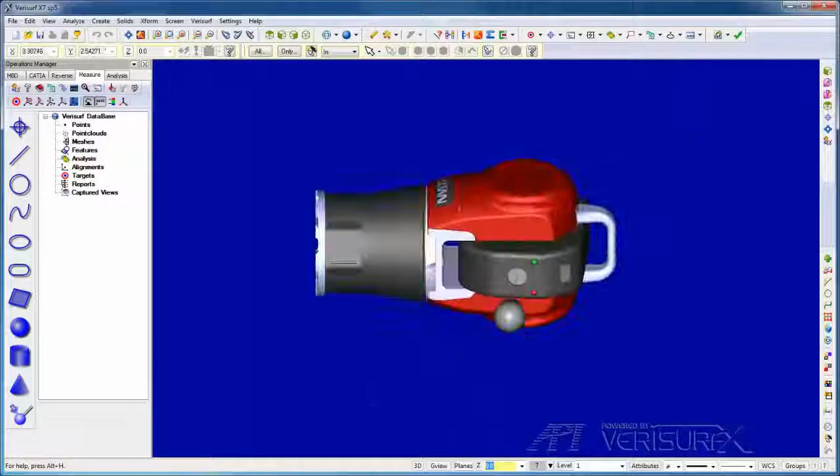The tracker has a measuring range of 160 meters, or 80 meters in any direction. The Radian includes both interferometer and ADM for accuracy as well as ease of use. The tracker mounts vertically, horizontally, or even inverted for measurement in tight quarters.

The iVision system uses an integrated camera for automatic target location and beam capture. Finally, the Radian includes an integrated weather station as well as an internal level. These are just some of the highlights of the Radian hardware. Next, we'll look at the software.

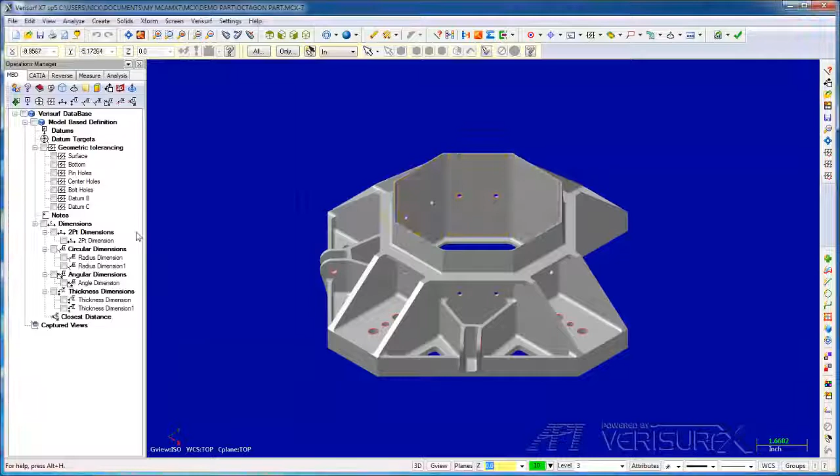Verisurf's metrology software is built on a CAD platform, giving it full CAD design capabilities. CAD is required for reverse engineering, but it's also very helpful when inspecting complex parts. For example, we can analyze the model, we can pull dimensions from the model, we can even manipulate the model.

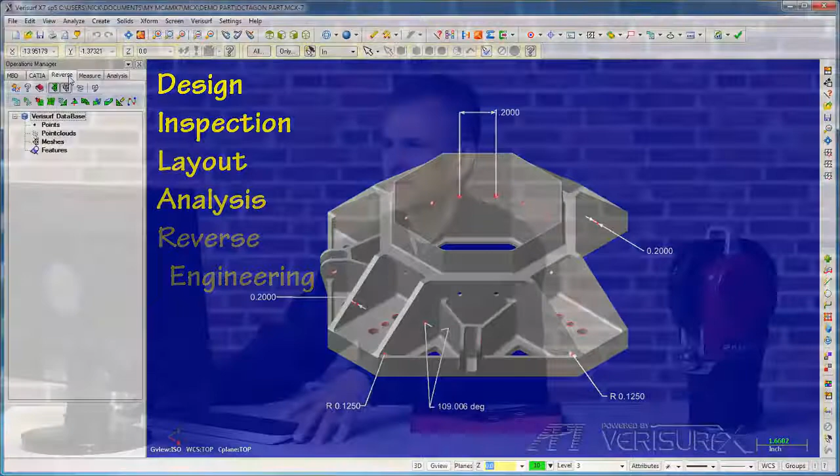In addition, CAD tools such as colors, levels, and attributes allow us to manage large part assemblies. Verisurf integrates design, inspection, layout, analysis, and reverse engineering all into a single application. Finally, Verisurf is designed for both print and model-based workflows. I'll continue by loading a model of our demo part.

Verisurf reads all popular CAD files, CATIA, NX, ProE, SolidWorks, etc. in their native format. This avoids the limitations of neutral formats such as STEP and IGES, which Verisurf also supports. When we open a native file, Verisurf saves it in the MCX format and leaves the original file intact.

All the data, including the model, the measurements, the reports, and the analyses, are stored in a single file to simplify handling and to prevent data loss. I'll select the MCX format and open our demo part file. The part is in place and the model's loaded. In the next step, we'll align the Radian tracker to the part.

After we load a model, we typically align the device to the part so we can get real-time feedback on tolerance condition. We'll use auto-align since it's the easiest way to align to a model. We start by placing alignment targets on the model to control the orientation of the part. Since the Radian is in front of the model, we'll place the alignment targets where they can be seen on a clear line of sight from the tracker.

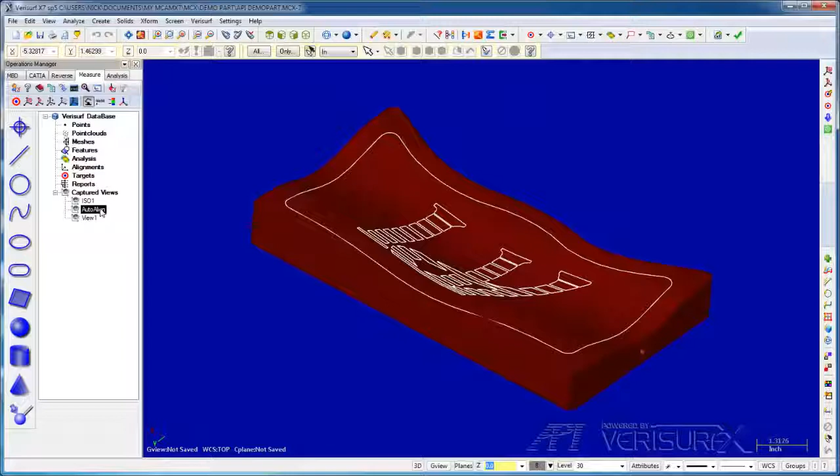I'll start by selecting an appropriate graphics view for the targets. I'll then choose Create Target and place alignment targets on the top, front, and side of the model. Since I want the graphics view to match the camera view, I'll restore the original view.

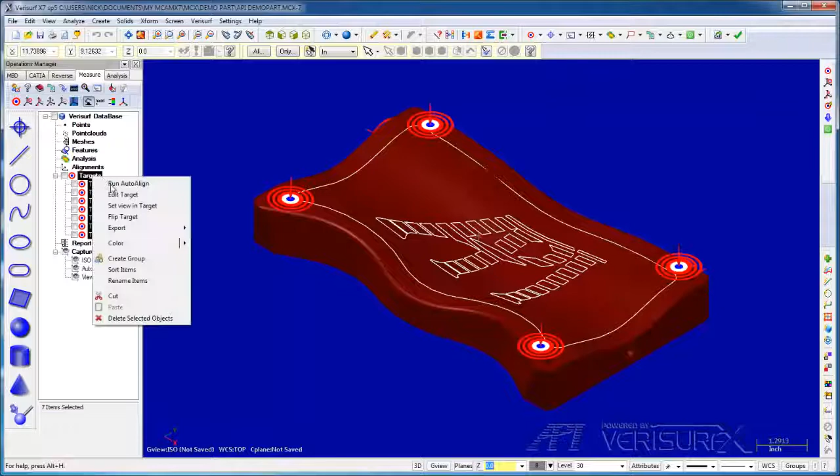Before I run the alignment, I'll edit the targets and enable Use Smart Point. When we use the Smart Point measuring method, Verisurf records the target when I hold the SMR stable on the part. I'll run Auto Align and measure the targets as they're highlighted.

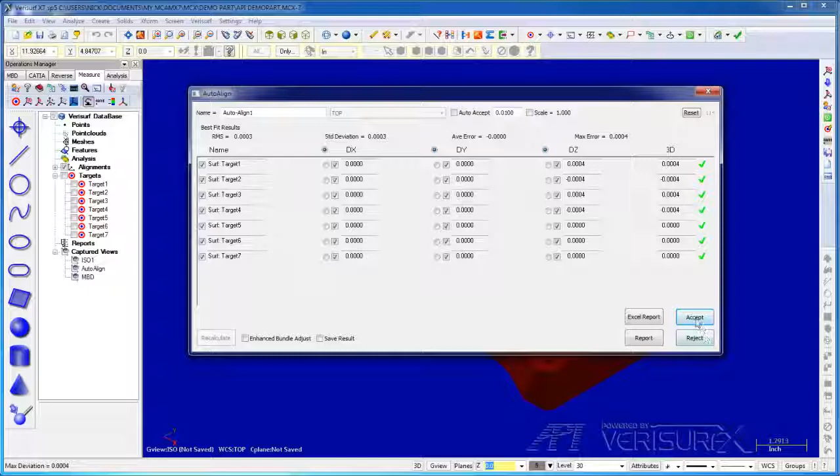When the final target is measured, Verisurf aligns the device using a best fit and shows the results dialog. We can review the results and modify the fit if necessary, but since the results look good, we'll choose to accept the alignment. When we do, Verisurf runs Inspect Build mode so we can verify the device alignment.

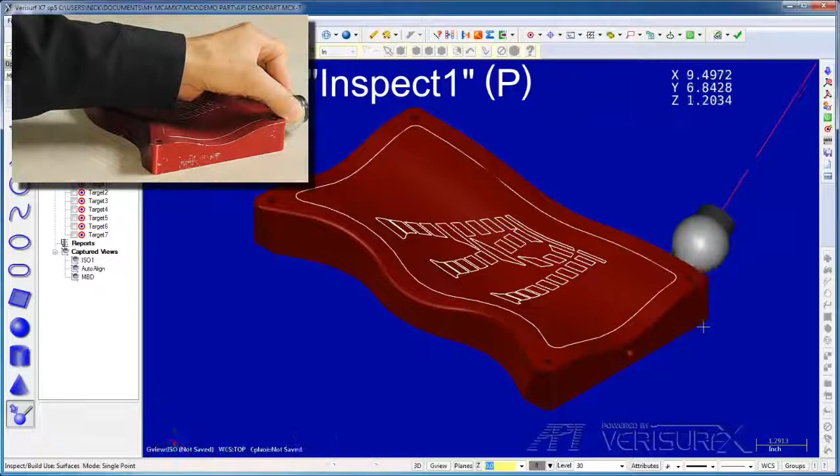The small deviations we see as I move the SMR around the part indicate a good alignment between the part and the model, which shows that our alignment is correct. This final check validates the whole auto-align workflow because it shows we had the right part, the right model, and we didn't make any mistakes measuring the part.

Auto-align is a very powerful tool for model-based alignment, but it's easy enough for beginners to use, and the results are easily verified using Inspect Build mode. The Radian is now aligned to the part. In the next step, we'll check surface profile.

In the previous step, we used Inspect Build mode to verify our device alignment. Inspect Build is a special measuring mode that displays in real time the deviation between a part and the corresponding features in a CAD model. When we're inspecting a part, the deviation reflects the material condition.

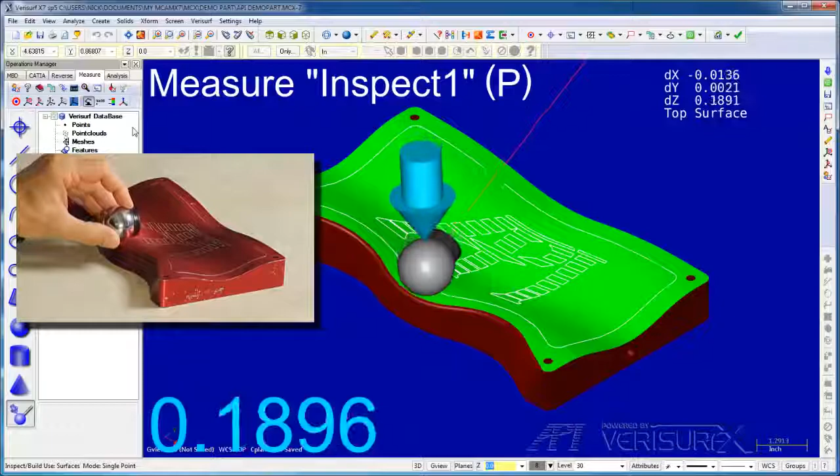When we're moving a part into position, the deviation shows us how far to move and the arrow indicates the direction. Since the Radian is already aligned to the part, when we check profile, we'll assume the deviations are due to errors in machining of the part. I'll continue by measuring deviations in single point mode on the top of the part.

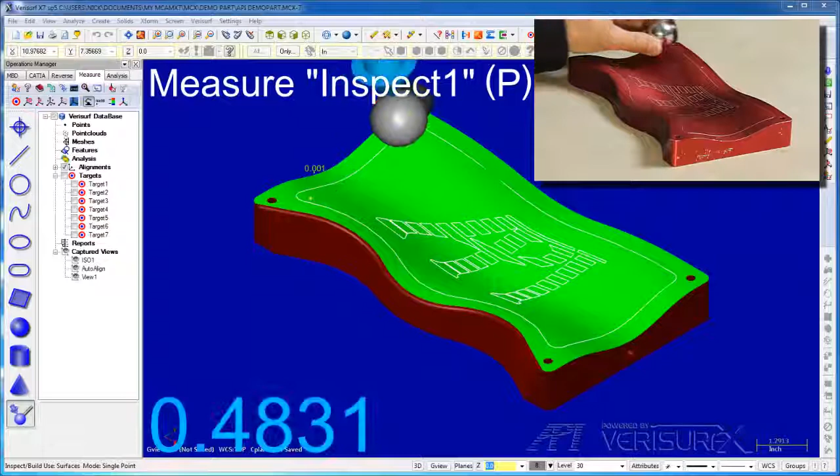Notice how the deviations are represented using an arrow and deviation text. Next, I'll switch to continuous mode and scan deviations around the part.

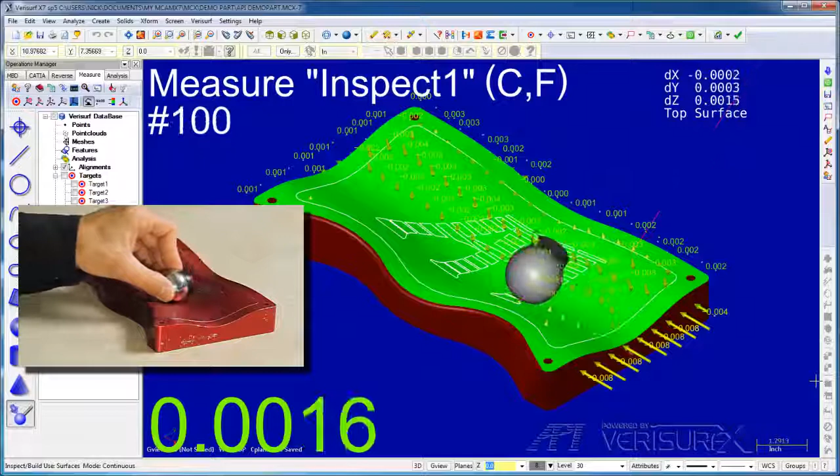When I press Escape, Verisurf creates an analysis object in the data tree. If I highlight the analysis, we can see the distribution of deviations in the color bar. If I double-click the analysis, we can change the way the deviations are displayed.

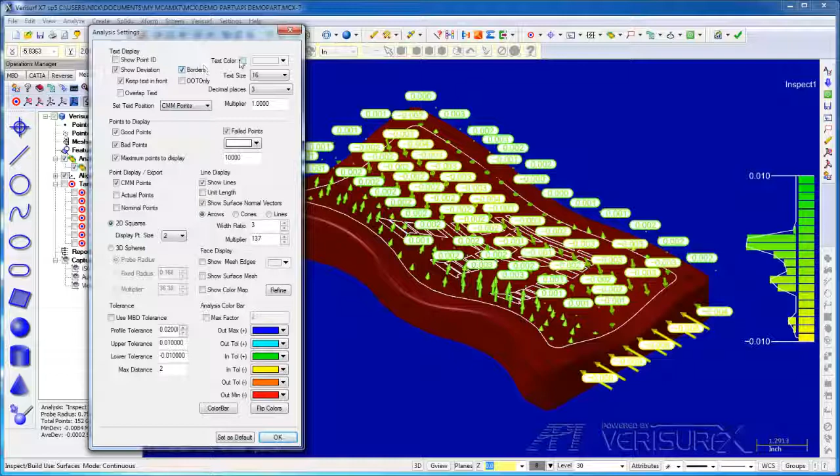For example, we can add borders to the text, we can switch from lines to spheres, and if we enable Use MBD Tolerance, Verisurf analyzes the data to the tolerance callout for each surface. Otherwise, it uses the global profile. I'll restore the original display and then save the results.

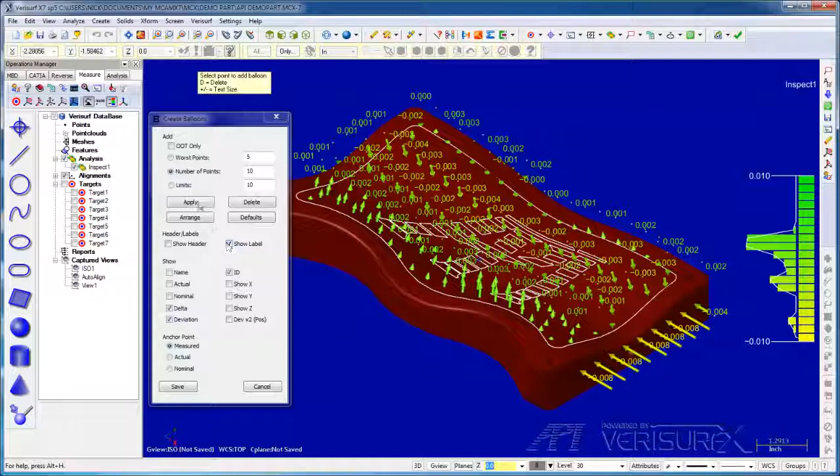Next, I'll annotate the deviations using balloons. I'll apply balloons to 10 random points. If necessary, we can manually rearrange the balloons. I'll save the results, highlight the analysis, and create a report. I'll rearrange so that the screenshot is on top.

Then I'll access Settings and change the logo from Verisurf to API. We have a number of output options, including PDF, HTML, Excel, Word, etc. I'll leave it at PDF and create the report.

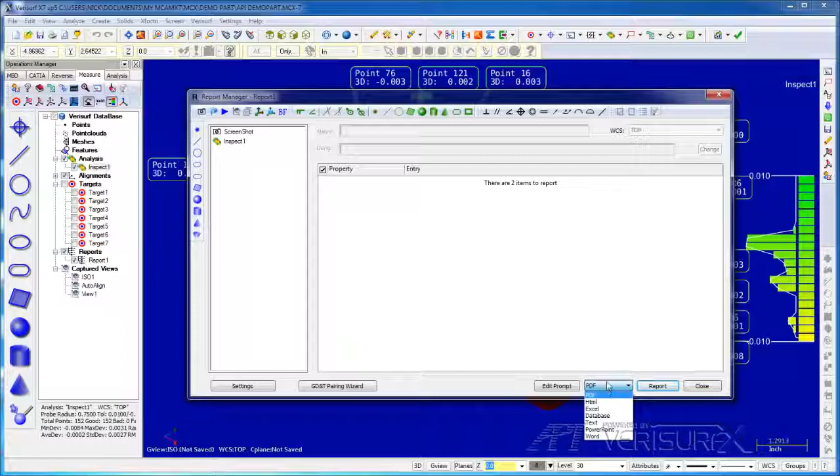When the report opens, we see the API logo in the header of the report. We see the annotated deviations in the screenshot, and we see the details in the body of the report. We've just seen how to use real-time deviation analysis to check surface profile. In the next step, we'll use it to position our demo part.

When we use build mode to position a part, we assume the form of the part is good and the deviations are due to errors in the position of the part. We refer to this use of real-time deviation analysis as build mode because it's often used to build fixtures and assemblies, but we can use it anytime we want to position an object in 3D space.

We'd normally start by aligning the device to the basis of the CAD model by measuring features with known CAD values. We did this in auto-align. We'd then build parts into position by moving them to their nominal locations. Since the API tracker is already aligned to the basis of the CAD model, we'll simply move the part and build it back into position.

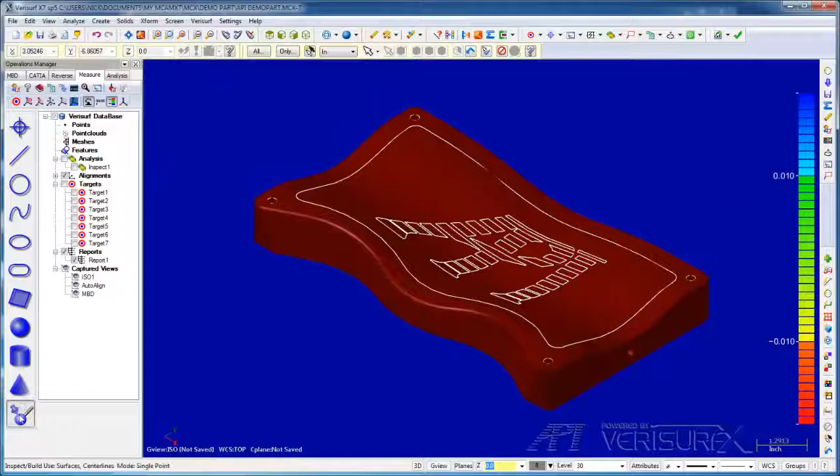I'll select and build to circles first because that's a quick way of getting the part close. I'll place the SMR into one of the holes and move the part in the direction of the arrow. This is just to get it close, so I won't bother using a pin nest. I'll then move to a second hole, repeat the process, and try not to move the first hole.

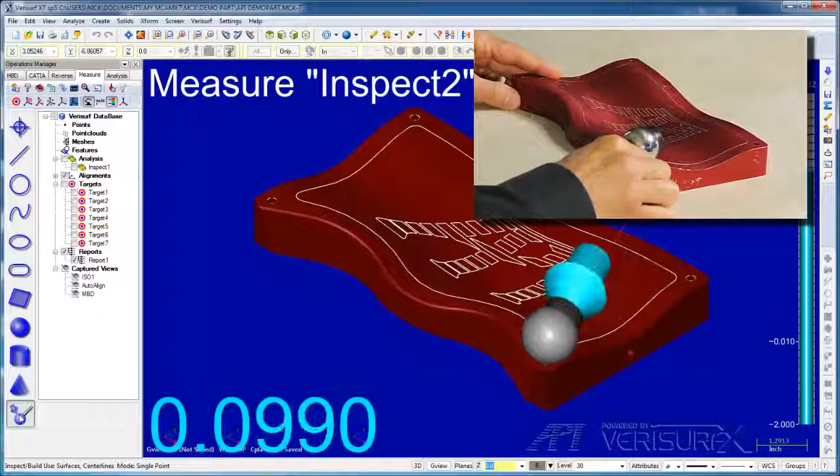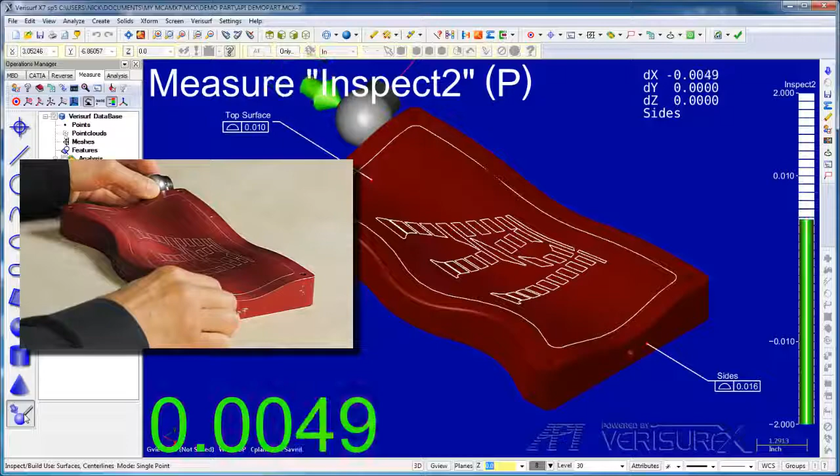When I'm close, I'll cancel the selection, display MBD, and build to surfaces to get it closer. I've enabled Use MBD Tolerance so we can use Surface Profile to control the build tolerance. In other words, as long as the surfaces are located within their profile tolerance, we'll consider that the part's in the right location.

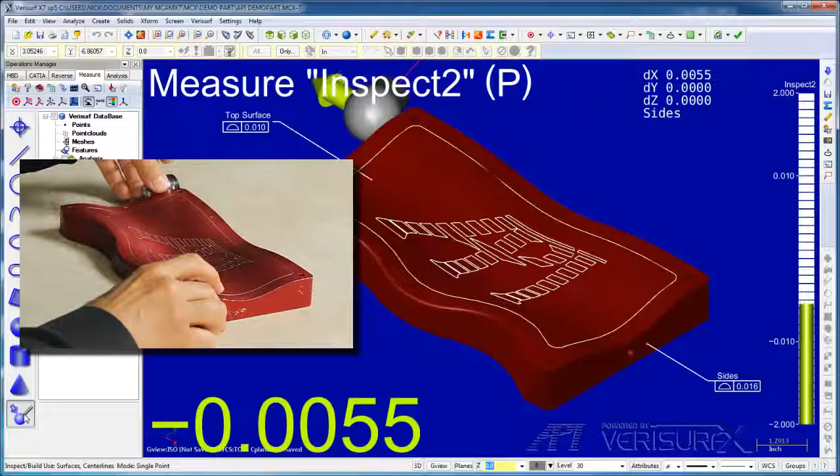You don't have to get this to 0, I just want to get it within tolerance. It's green everywhere, so we'll call it good. This is a very simple example of a build application. Positioning a part in 3 dimensions is much more complicated, but the process is essentially the same. We've now positioned the part within tolerance. I'll tweak it a little bit for our next step.

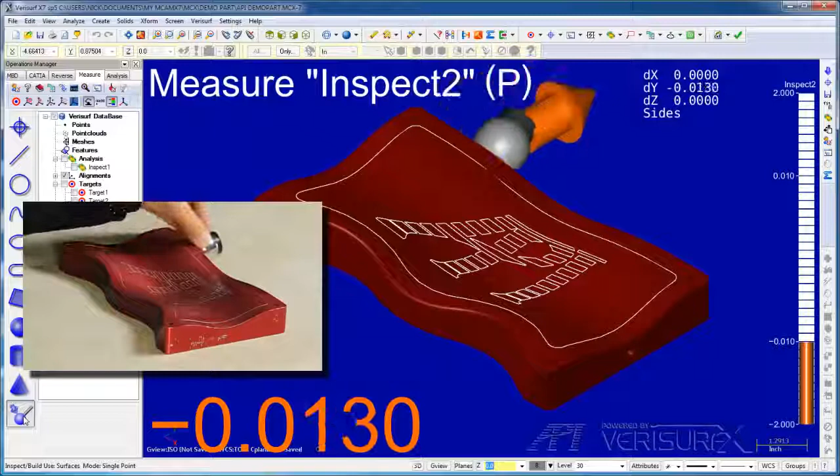We've used Inspect mode to check our part in real time. In the next step, we'll perform a similar analysis, but we'll start by measuring point clouds. I'll begin by running Inspect mode to verify the device alignment. We know the part is good because we've already inspected it, and we know the alignment's bad because we left it that way at the end of our build demo.

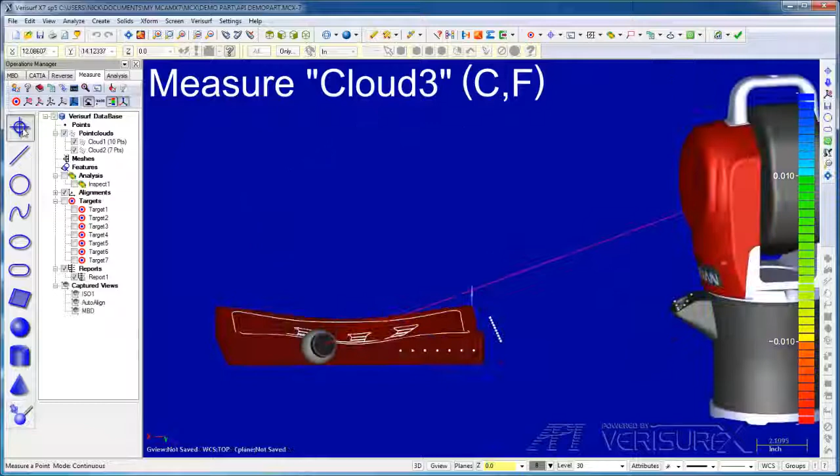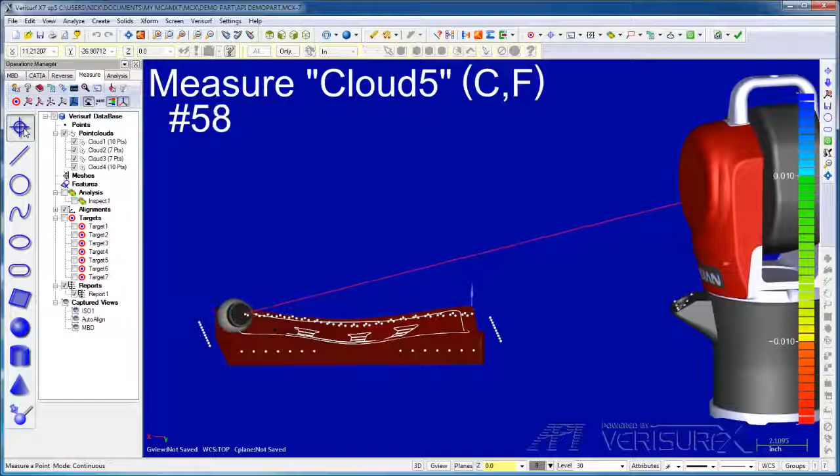I'll switch to point collection and scan point clouds around the part. We're not getting real-time deviation analysis, we're just collecting raw probe center data.

When I'm done measuring, I'll press Escape and highlight the Analysis tab. I'll select the point clouds and choose Analyze. The results are similar to what we saw in Inspect mode, but the deviations are much larger because of our intentional misalignment. I'll hide the analysis, select the point clouds, and run Best Fit. I'll start by running a baseline analysis.

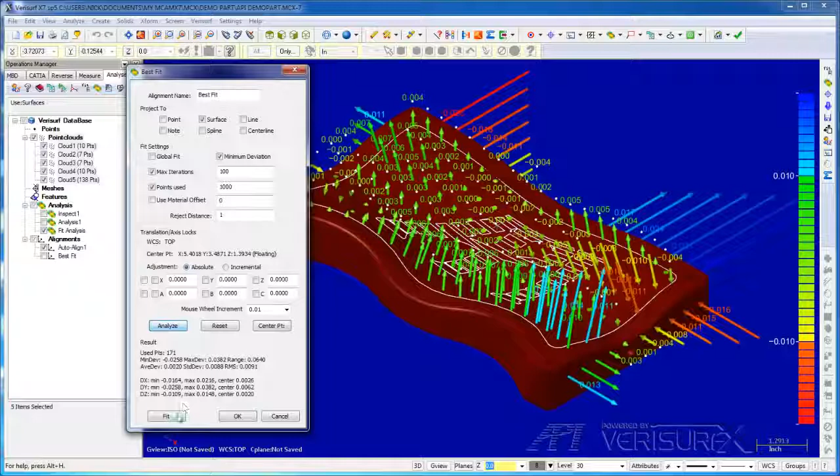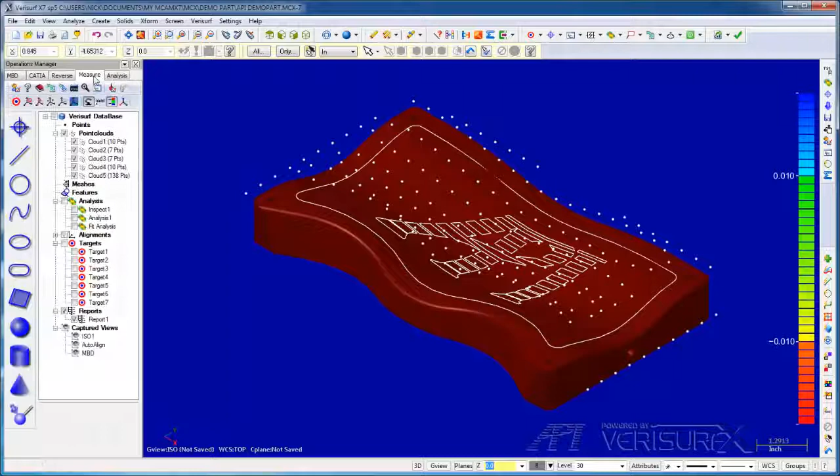When the fit is complete, the results show the part is good, similar to what we saw in Inspect mode. I'll choose OK and apply the Best Fit. If I toggle between the before and after Best Fit, we can see the improvement. I'll select the Measure tab and run Inspect mode. We can see from the small deviations that the Best Fit is applied to the device alignment as well.

Inspect mode, which we saw earlier, and Analysis, which we just performed, are very powerful tools for model-based inspection. Next, we'll measure and analyze prismatic features. All of the workflows we've seen so far have been model-based. We've aligned to a model, we've inspected and analyzed to a model, and we've built to a model.

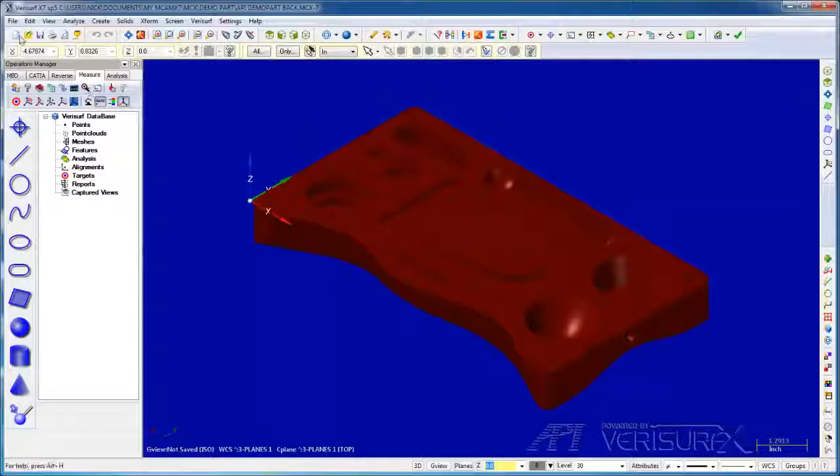Next, we'll discuss print-based inspection and reporting of prismatic features. I'll align to the part frame shown here, but since we're not using a model, I'll open a new file. I'll start by measuring a plane and 2 lines for our alignment.

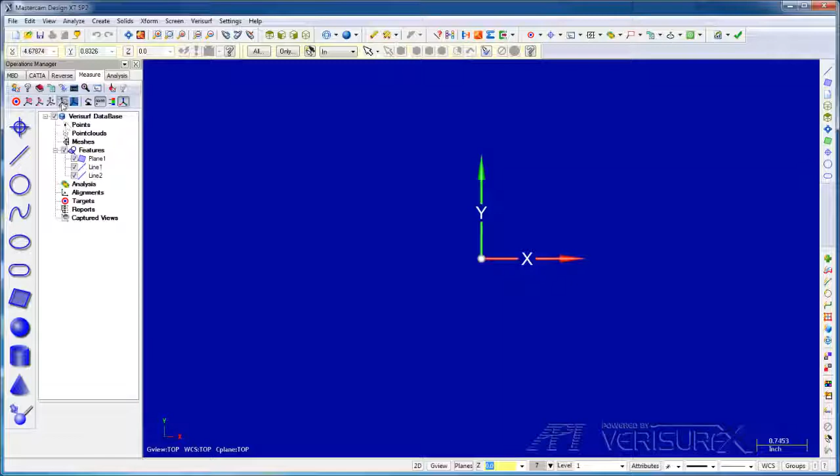Next, I'll run feature align. We can see that the origin is located at the intersection of the two lines, so our data is aligned correctly. If I place the probe at the origin, we can see the device is aligned as well. I'll continue by measuring features, starting with the large hole.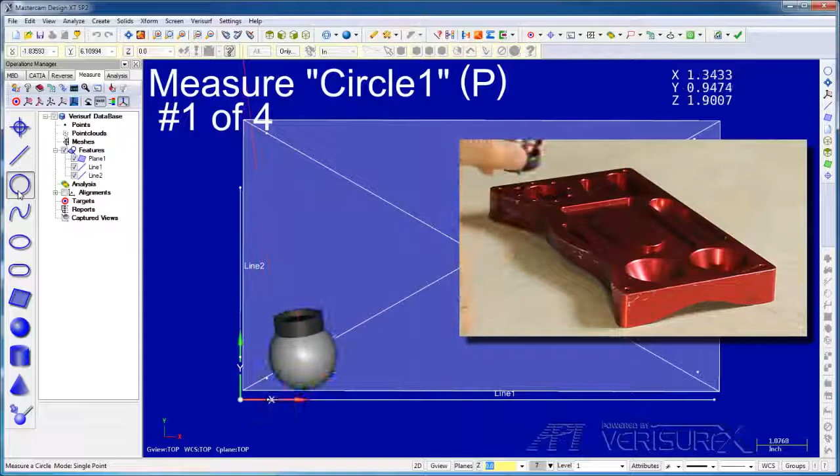Next, I'll measure a slot. I'll measure the 4 holes at the corners as though they were a hole pattern.

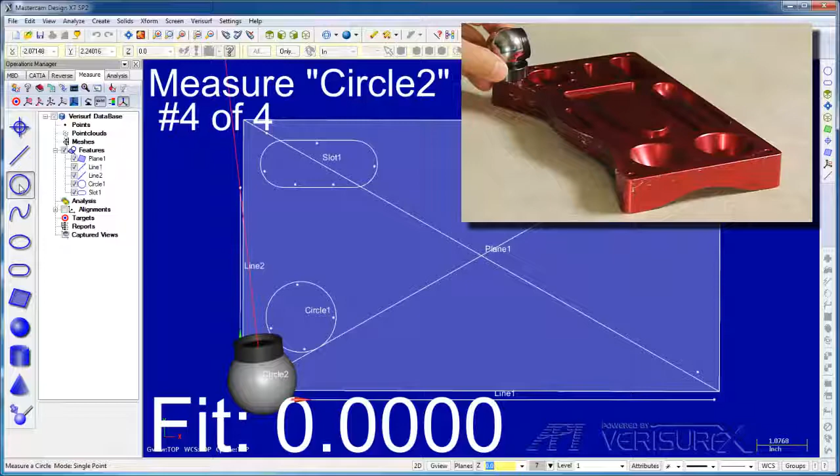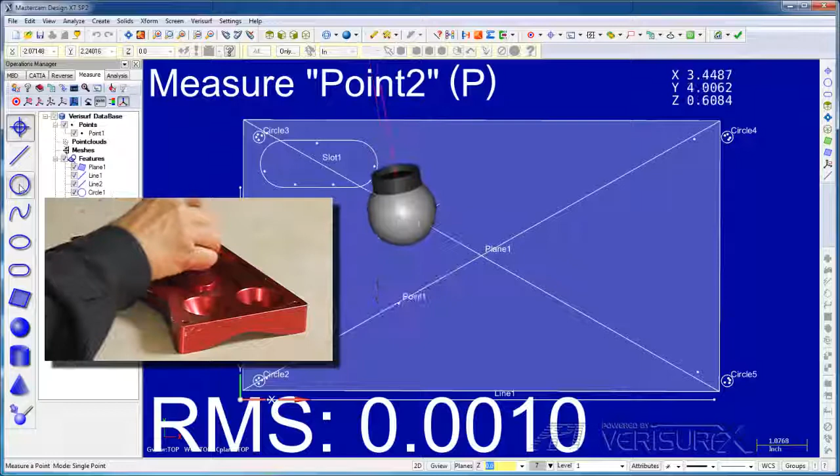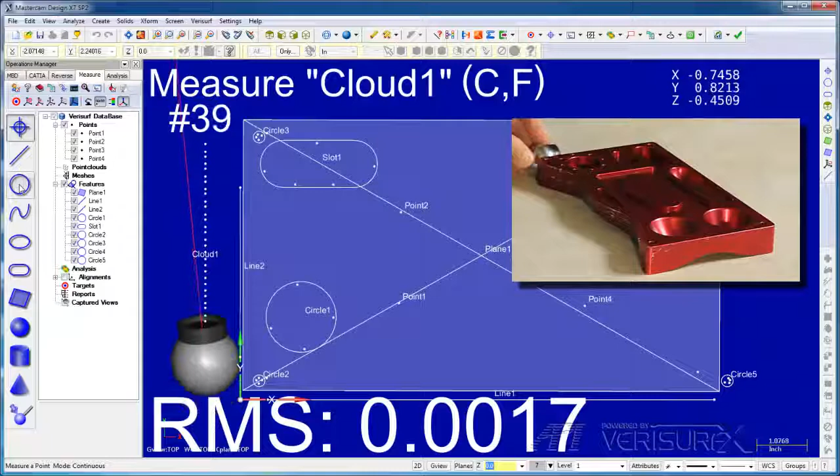Finally, I'll switch to point mode and measure the recessed plane on the top of the part. I'll then switch to continuous mode and scan the plane on the left end. I can fit the 4 points on top to a plane, and I can do the same for the point cloud.

At the beginning of the presentation, I mentioned the use of API's iVision for beam capture. Before I finish this section on measurement, I want to explain how that works. If I break the beam, I simply point the SMR back towards the tracker. The built-in camera automatically locates the target and the tracker resets the distance. I can then continue measuring. In addition to beam capture, iVision also supports other API accessories such as the i360 probe.

All the features we've measured so far are displayed in the data tree. If we highlight a feature, we can see its characteristics such as shape, size, and position. If we highlight 2 features, such as 2 points, we can see the distance between them. If we select 2 circles, we can see the angle and distance between them. We've seen how Verisurf and the API tracker measure prismatic geometry. Next, we'll see how to analyze and report the results.

We briefly saw the report manager when we reported our inspection results. Next, we'll take a closer look as we analyze and report our measured features. For this report, I'll select the planes and the circles of the hole pattern. When I choose the Reports button, the features are displayed in the Report Manager. If I highlight a feature, we can see its characteristics in the Details pane. We use these fields to enter the nominal and tolerance values. I'll enter the nominals for Circle 2 so we can report its position.

The toolbars allow us to add nominal features, to construct features, and to add GD&T callouts to the report. I'll use them to construct the plane and then the circle through the hole pattern. I'll start by selecting the circles and then choose Construct Plane. With the circles still highlighted, I'll choose Construct Circle to create the center of the pattern. I'll then rename it Center. I'll construct lines from the center to circles 2 and 3. I'll then select the lines, calculate the angle between them, and enter the nominal value.

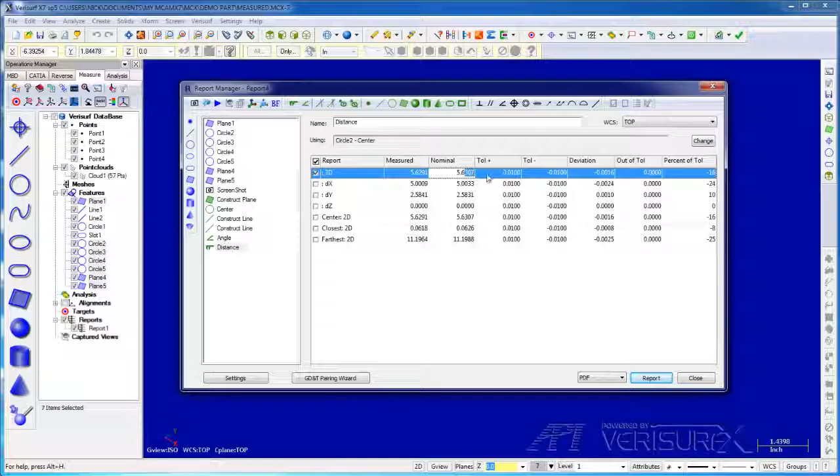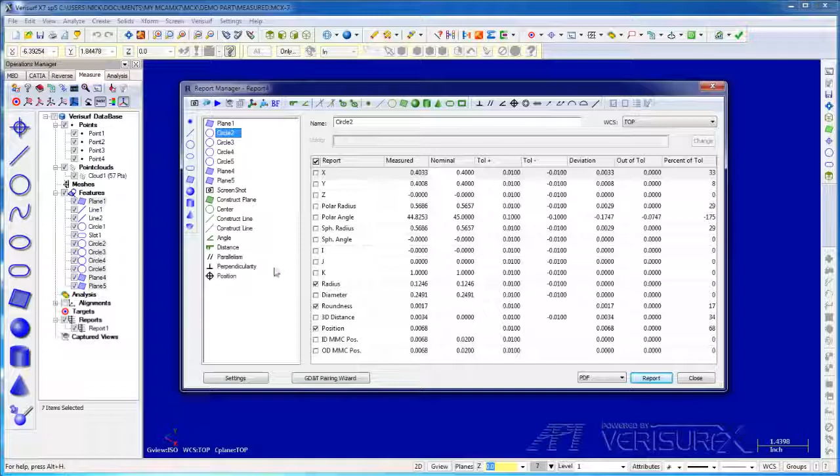I can calculate the distance from the center to circle 2 and enter its nominal value. I can select the two top planes and calculate their parallelism. And I can select the top plane and the end plane and calculate their perpendicularity. Finally, I'll report the position of circle 2. I want only the final values for the report, so I'll highlight them before I create the PDF file.

When I open the report, we see the API logo in the header, and we see the details in the body of the report. This is a very simple report, but it demonstrates constructions as well as the use of GD&T. Earlier, I referred to the measurement, analysis, and reporting of prismatic features as a print-based workflow, but it works equally well, if not better, with a model.

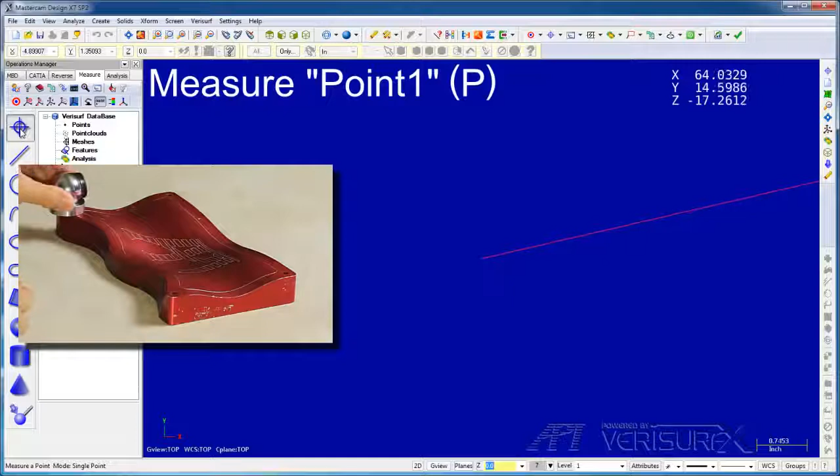For our final example, we'll look at reverse engineering. Verisurf's reverse engineering tools enable mixed modeling with prismatic features, meshes, NURBS surfaces, and solids. Moreover, we can take advantage of the many CAD tools inside Verisurf. For this demo, I'll scan and then surface the top of the demo part. Since the part has tooling holes, I'll begin with a simple 3-point alignment. I'll open a new file and measure the 3 points for the alignment. Next, I'll run 3-point align, fit the data to the screen, and accept the alignment.

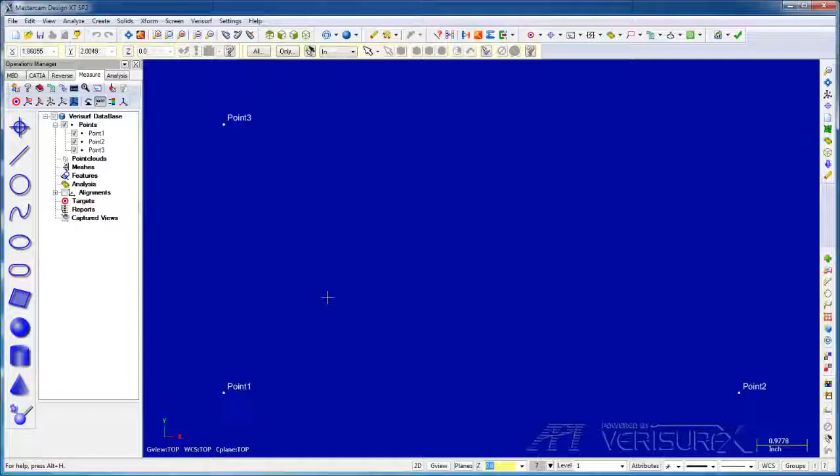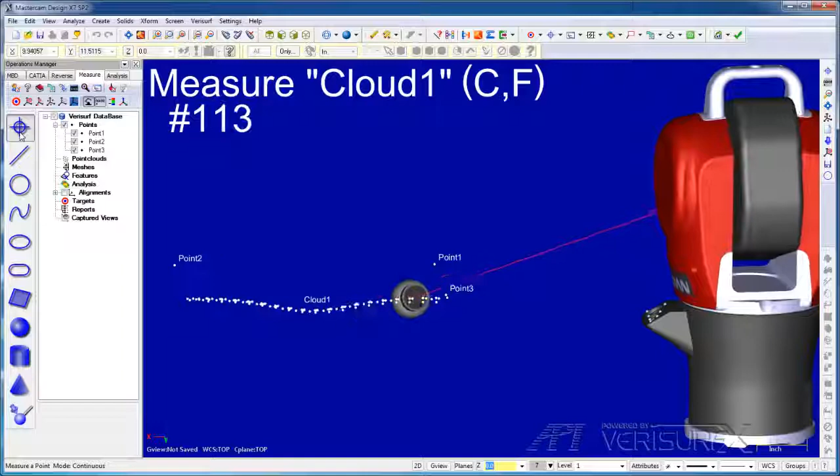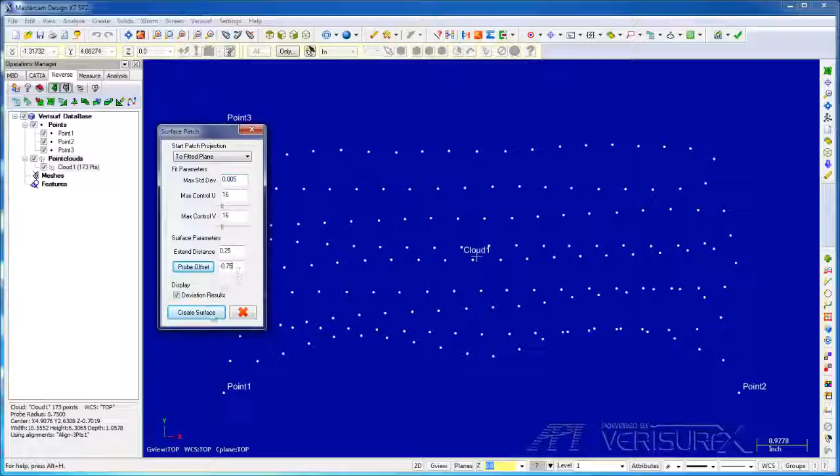I'll continue by scanning the top of the part. When I'm done measuring, I'll press Escape, select the Reverse tab, highlight the point cloud, and choose Patch. The parameters allow us to control the accuracy and complexity of the surface. I'll verify that the probe offset is correct for an SMR, and then create the surface. When the results are displayed, we can see the values are in range, so we'll accept the surface.

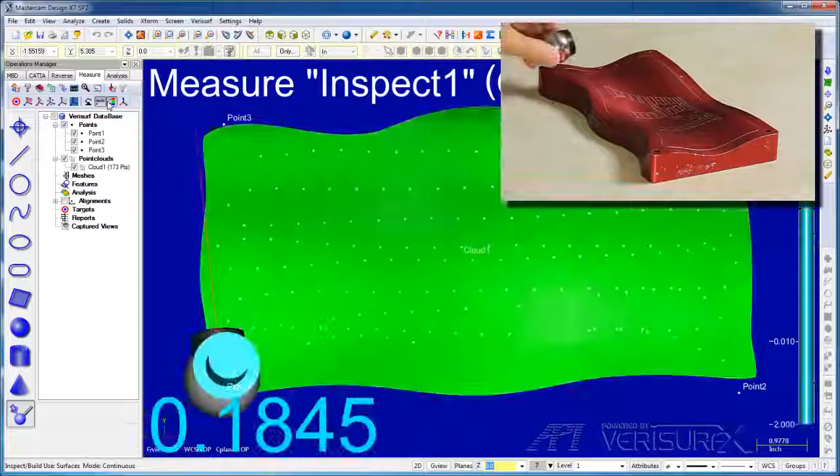We now have a surface that the parameters indicate is good, but how can we check the results? On the Measure tab, we can run Inspect and compare the surface to the part. On the Analysis tab, we can analyze the point clouds to the surface. Since the data from the Radian is traceable, we have a way of proving the accuracy of our surfaces. This is a very powerful capability of an integrated metrology platform. This was a very simple example of reverse engineering, but it shows how easy it is to create and to verify CAD surfaces.

That concludes the demonstration. I hope I've given you a good appreciation for how Verisurf metrology software enables the API Radian tracker with a complete set of model-based tools for alignment, inspection, tool building, analysis, and reverse engineering.